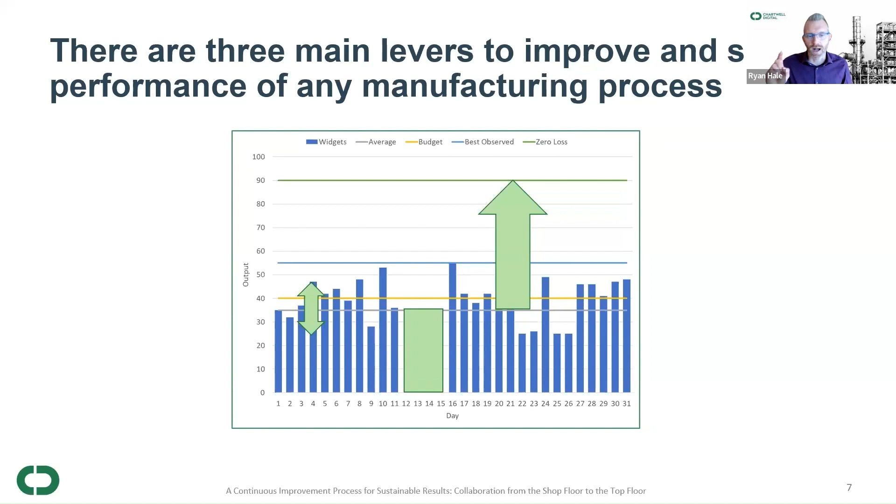In general, there's three main levers to improve that process, three large types of opportunities. So if you just do one click for me, those gains can come from either reducing variation during running hours, hour to hour, shift to shift - how do we achieve more consistent performance against a previously achieved level?

The second example in the middle here would be reducing the frequency and duration of downtime. It could be planned downtime, like weekly sanitation or preventative maintenance work, or it could be unplanned downtime that occurs from reliability challenges and asset failures.

And then the final opportunity on the right-hand side here is how do we shift the whole average higher up? How do we identify constraints in the organization that are preventing that process from achieving a higher overall average, and how do we remove those constraints?

So we could measure our performance against any of these lines across the page here. The gray line would be our recent average. The yellow line, perhaps we have a budget or a target that we're trying to hit. The blue line could be a previous best observed or best demonstrated capability of that process.

And then the green line at the top is really what the laws of chemistry and physics would say are the limitations of our process capability. So really looking at a first principles view of that process and identifying what's holding us back from a higher level of performance. Go to the next one, please.

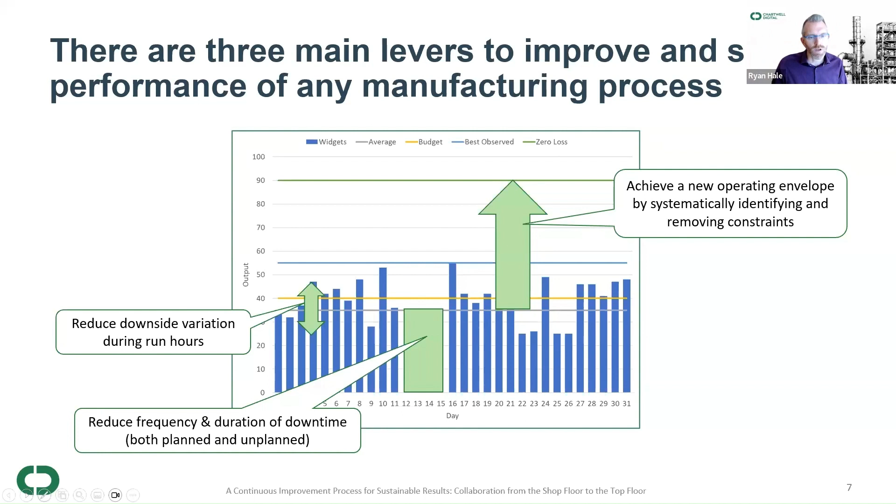Autonomous improvement is another phrase I've heard for the same concept. In this model, we're really looking to empower employees to understand their goals, to translate organizational goals down to the department, the shift, the individual level, understand methodologies and resources they can apply in terms of tackling frequent challenges or issues they see on a daily basis, and really to take action without asking permission. We want to give people a box to operate in where they are empowered to take action if it fits the opportunity, if it fits in methodology. Don't ask permission, just make the business better.

If we're talking about shifting the capability of an asset beyond what's been demonstrated in the past, by necessity this is going to be a cross-functional effort. We're going to need process engineering, operations, maintenance, reliability, technology experts, and input from sales and customer-facing resources to make sure we understand not only what's possible, but how to get there.

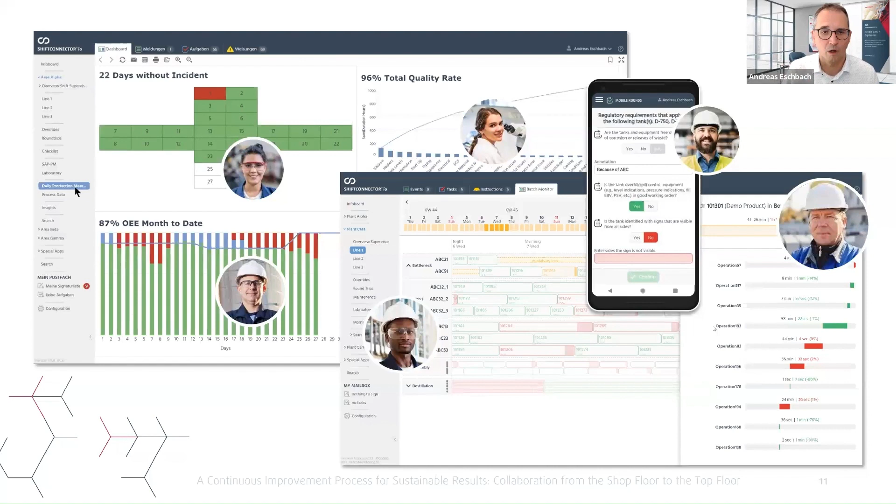And finally, on our model here, it is all about getting the different roles integrated on one single platform. On the left side, the different people with their responsibilities, and on the right side, the different applications. So it's a lot about integrating both worlds, the best of the people as well as the best of the machinery or software, because we want to avoid the risk of human communication errors.

Or that somebody knows something but hasn't shared it because he's working on night shift. You would like to give them easy opportunities to do so and get visibility across all the different roles, but also across all different devices. So being independent of a certain desktop or a certain control room, and collecting knowledge about the plant so that it is available to all people in the plant, even those who are not at work at the moment.

Like a process engineer, who usually works on a day shift from Monday to Friday. And that adds all towards more transparency, a single point of truth, a single point of collaboration, where the people have transparency across the shifts, transparency across different locations. And yeah, let's have a look how that could be done on a daily basis here.

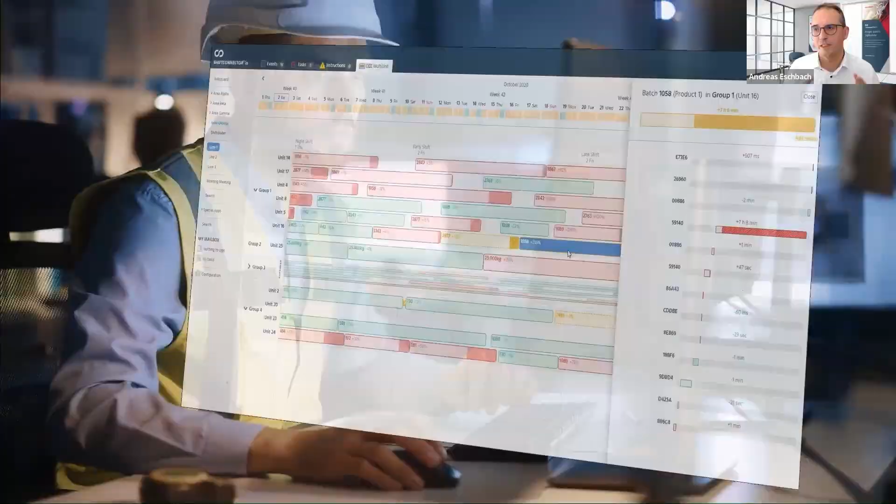We see here this guy, 4 a.m. in the morning, he encounters an outlier in a certain batch phase. So there is a problem which he gets reported from the OT data. He recognizes that, he's informed in his shift handover protocol, but even more, he can see here all the batch phases according to ISA 88 in this case.

He reports a vacuum problem at a certain pump. He selects this pump as well, gives some prose text with additional description. And in this case, he also activates the priority to morning meeting, so he escalates it even to tier 2.

He adds a PM notification, in this case a repair request, as an emergency repair request towards the maintenance team. At the same time, everything he encounters and observes during the night is collected. Sun is rising, and he will leave the shift.

He hands over to the colleague, and the colleague then afterwards is in the tier 2 meeting, reporting back to the whole crew. Everything is at hand - they have the information from the night shift operator available, can dive into certain problems, see details, and have the repair request at hand.

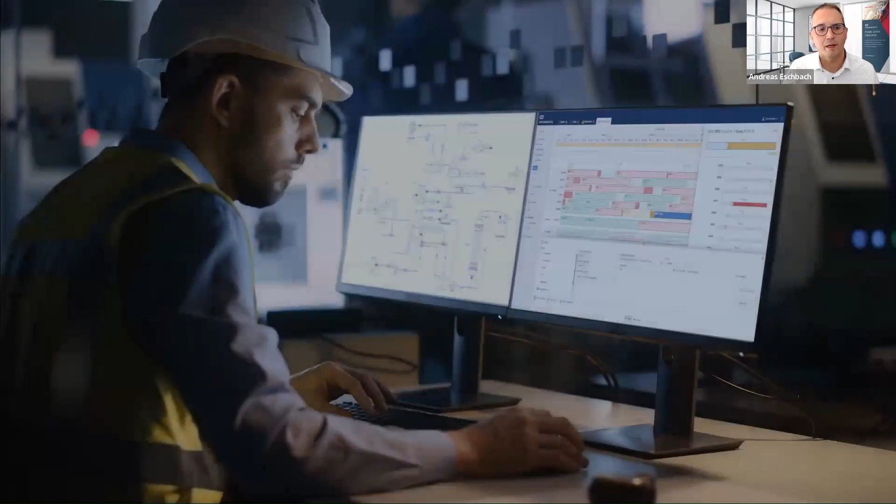And this all integrates the different tier levels up to tier 3. If you think about the further levels, you also have the business unit level, which is then tier 4 or 5, where you have weekly meetings to understand your whole manufacturing network. The cool thing is you have it reported on the line level, but it's also available towards the business unit reporting.

So it connects the shop floor to the top floor and has one single source of truth. That helps definitely with getting a better overview, getting more reliable data, and standardizing the reporting of, for example, the overall equipment effectiveness throughout the company, establishing one single way of reporting.

It adds a lot of transparency. And now the question is, wouldn't those people be triggered to have improvement ideas? That's where we come in with the CIP process, which is also embedded as shown before in that diagram.

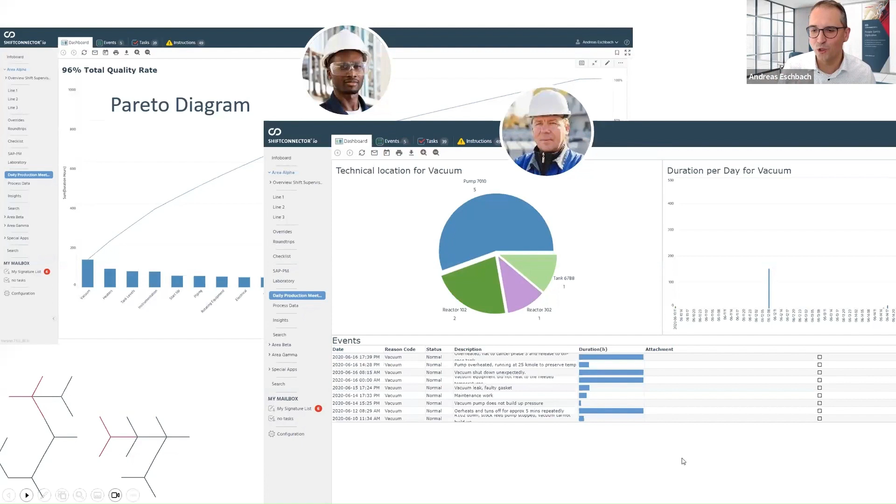But first of all, here it is easily embedded, so you give on, let's say, a shift supervisor, shift handover, or operator level, a lot of functionality and a lot of data into the hands of people, which just makes them aware. And again, it's about triggering solution ideas, thinking about what they're doing, what they encounter.

And that's what you see here in this video, how easy it is if you have a certain quality deviation, for example here a dosing problem, and you can easily add now a continuous improvement proposal. They have to add the problem, they also write down the cause, how they encountered it, the measure taken, as well as a solution idea if they have any, and furthermore also adding an effort and benefit estimate.

So making the people on the line level think about their idea and what it could mean to the company or to the plant. Now, fast forward, Friday, weekly CIP meeting on the line level.

You see all the ideas generated get together. You can easily dive into those and gatekeep them. So the whole CIP round either approves it or rejects it, and importantly, if rejected, give a comment, having everything at hand, even the quality deviation it was attached to at the beginning.

So easy to create, no hurdle, just sharing and also receiving feedback, because that's the important portion as well on creating ideas. The people working the night shift want feedback on what the CIP meeting thought about that and how they decided. In this case, now approved.

Let's think about another topic. We mentioned earlier this collaboration is so important. It's not only one direction sharing ideas, but also sharing learning.

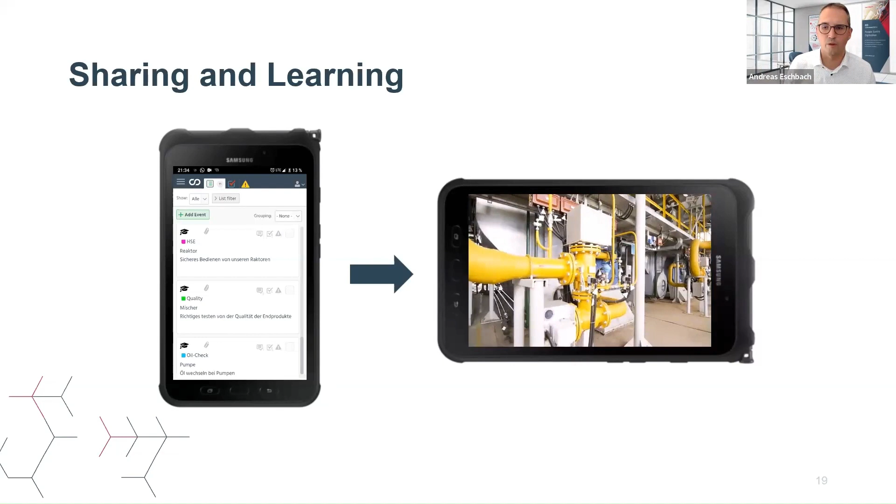Again, let's share how easy it is. We can attach such a micro learning, as we call it here, easily with some description, but also further attachments, having files like a video or an explanation here in the attachment.

And now the key is to share it with the whole team. So we have the shift crews here available, everyone should receive it. Now the micro learning is shared.

Even with those who are on vacation, when they come back, they see it in their inbox that they have to watch that video or review a certain learning. They enter the mailbox, open it, and just confirm with their password. And with that given, obviously the continuous improvement team can see that one of these 16 people has already signed for it. And yeah, that's one thing, how to integrate.

Another option is simply to integrate it into your daily rounds. So if you want to make it standard, you can integrate it into a safety walk or similar. For example, you have this person here in the basement, so it needs to be offline, they walk around using Shift Connector Go, our way of doing outside rounds, operator safety walks, inspections, so to say.

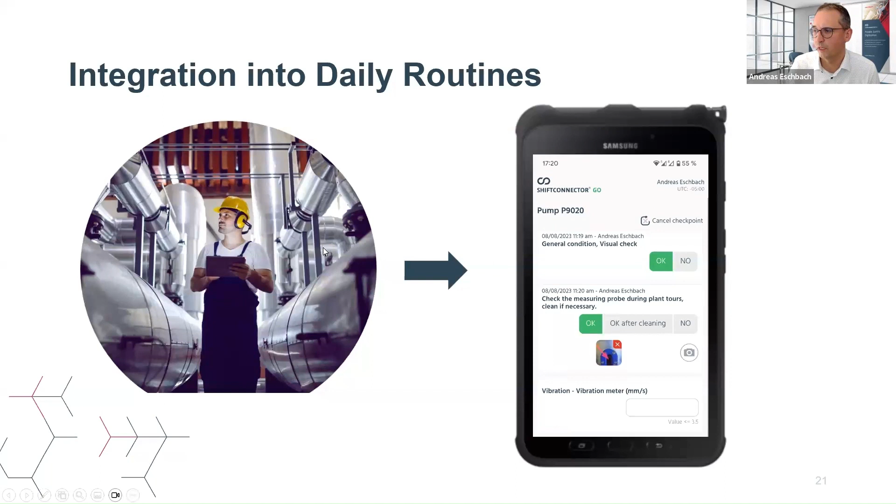And you see here that we have a new question: check the measuring probe during plant tours, clean if necessary. And we also want to understand, was it okay? Did they need a cleaning or not? So depending on what you need.

All that is what you see is what you get. So you can easily configure those checklists, extend them, and share them with the whole team. And that's a big portion of it. It needs to be adjusted to the local needs.

You need to act easily, as Ryan said earlier, and you need to get those portions between the standardized tier meetings as well as the CIP closer, so that CIP measures or CIP improvements can be easily shared with the whole team.

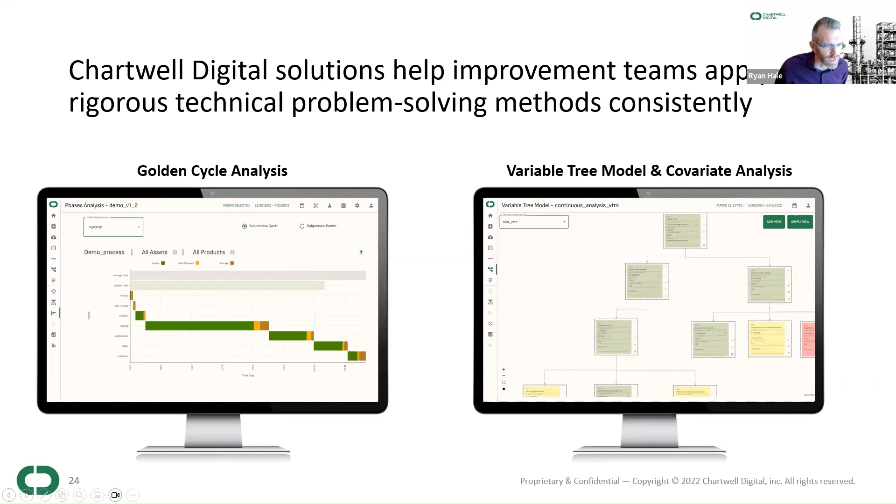The business context is that they're approaching the patent cliff, with 2 years left on patent where they still have a significant price advantage in the market. Sales demand exceeds their current production capacity, so we'd call that production constrained. If they're able to unlock additional throughput from existing assets, they have the sales demand to sell that, but only for 2 more years. That's a short enough time horizon that building another facility or doing a large capital project to expand capacity just isn't feasible to recover that investment.

So when the client reached out to Chartwell, our process was to start with what we call an opportunity scan, which is a way to review not only the recent data around production, but also to spend time in the facility with the team, do observations of how the plant runs, and identify and quantify specific improvement opportunities to capture that demand in the market.

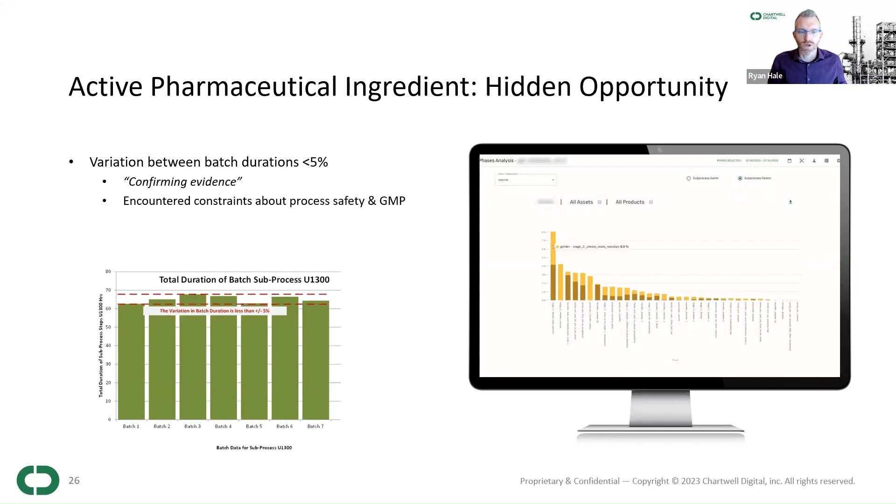So we knew we needed to go to the next level of analysis and look for where the opportunities might be hidden. The solution automatically evaluates the recent batch and phase data to calculate the best demonstrated capability, and also the 'best of the best'—the golden cycle. If we could achieve the best individual phase performance consistently and create a perfect batch across all phases, how much opportunity is there to recover? By looking at the 5th percentile best achieved, we found up to 63% of the time at the reactor could be unlocked for additional production.

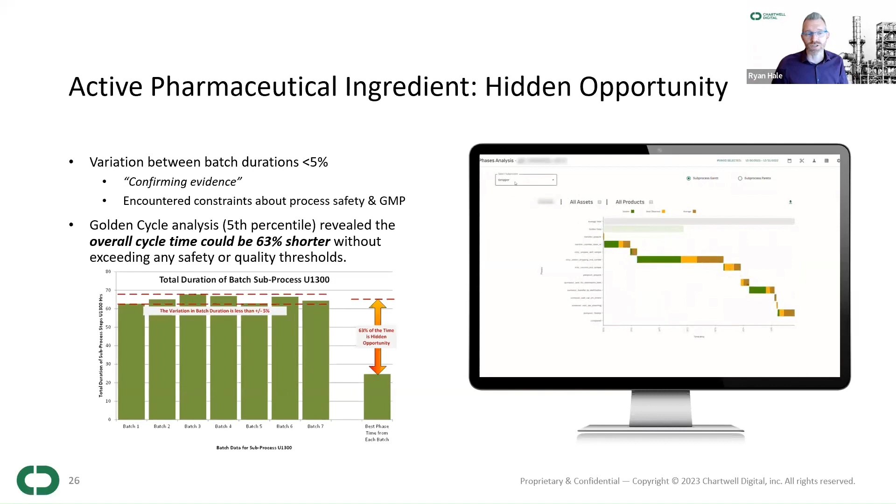By looking at that next level of detail and seeing that there is variation in the durations and yields from each of those phases within that complex reaction recipe, a significant amount of opportunity was revealed. This is the point where the engineers leaned forward and said, 'This is interesting, this is new information, let's see if this is real - not just a hypothetical opportunity.'

So the next step in the process would be to charter an improvement team, as we saw in the introduction. There was a very strong business case to devote some resource to this. Even if the team could only achieve half of that 63% potential opportunity, it was well worth the investment in creating that team to follow this methodology. So this is the point where we flip from opportunity identification mode to opportunity realization mode, and applied the next problem-solving technique that we call variable tree analysis and covariate analysis.

The little video on the right-hand side shows how embedded within the Chartwell digital application is a way to model that process, to create relationships between those process variables, and to directly link the nodes of that variable tree to the source data coming from a historian. It gives an engineer a very intuitive resource to do that analysis without switching windows or tabs - we're not running queries in SQL, dumping stuff into a Power BI platform, or scribbling on a whiteboard. It's in a secure interface that allows process engineers to collaborate and apply those techniques consistently across a large organization.

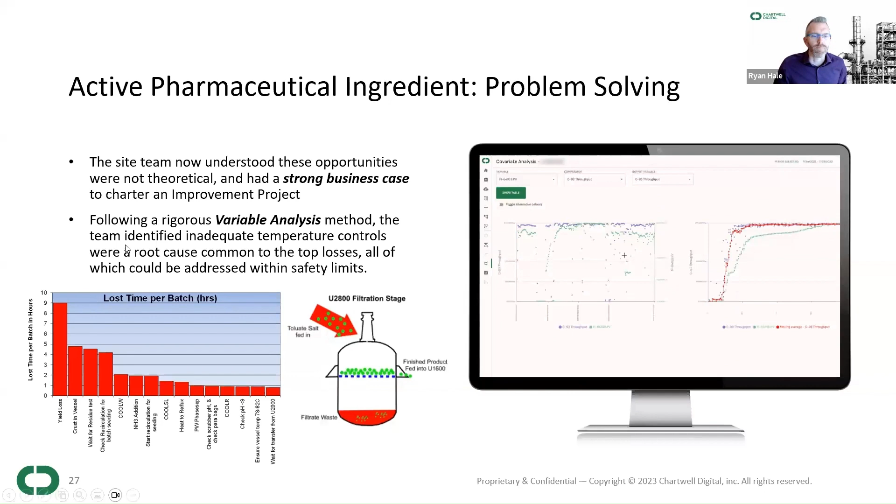By building this structured understanding, by focusing our analysis on the process conditions that truly relate back to that outcome we're trying to drive, that's what makes this technique so powerful and really accelerates the rate of results. So the results, the outcome for this business were really quite powerful.

It was a £4 million impact on their bottom line that was achieved in 3 months. For the business itself, not only did they massively increase their free cash flow and the results they could yield over those last 2 years while they were still on patent, it allowed that site to spin out from their controlling company, and for the leadership team there to run a successful independent business at this much higher profit margin. And for the people on site, it really was an eye opener.

They were able to solve these issues that had been persistent, that were sort of hidden from view, and it turned on a sense of curiosity, intellectual curiosity, and gave the team a sense of empowerment of, 'Hey, we can probably find other opportunities elsewhere.' That sense of, let's go and challenge some of those other constraints that we have in our business. Where else do we think that we're operating as good as we can? Maybe there are opportunities hidden elsewhere by applying this technique.

So again, it's going back to that balance of not only the technical results, but the capabilities we're building in the organization - the ability to document the results from this problem-solving technique and store it in a way that can be accessed later, and can be shared with other facilities that may have similar equipment, similar processes.